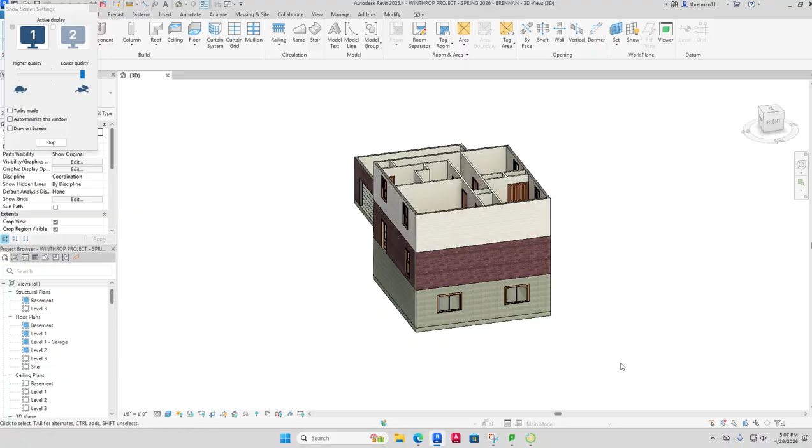Okay, so I've got this right now. Now let's say, as we're working with this, I want some other information. There's a lot of content out here. But let's say you want to put in a kitchen, and you want to put in some items such as appliances or something else like that. Well, it's not necessarily all going to be here. Just to remind you, we talked about this before. These are going to be kind of limited, but you can get other things. So if you can't find it, you could easily go out to the internet and look for it. So this is what I mean right here. What you could do is 2 different places.

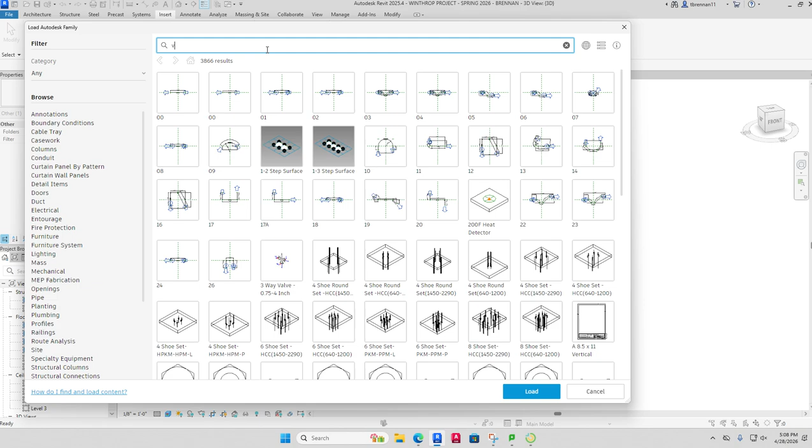First of all, if you go to the Insert tab and go over here to Load Autodesk Family, you can go out here, and this is where you could just do a quick search. If you type in vehicle right here, well, there's nothing there. If I go to truck, there's some trucks here, okay?

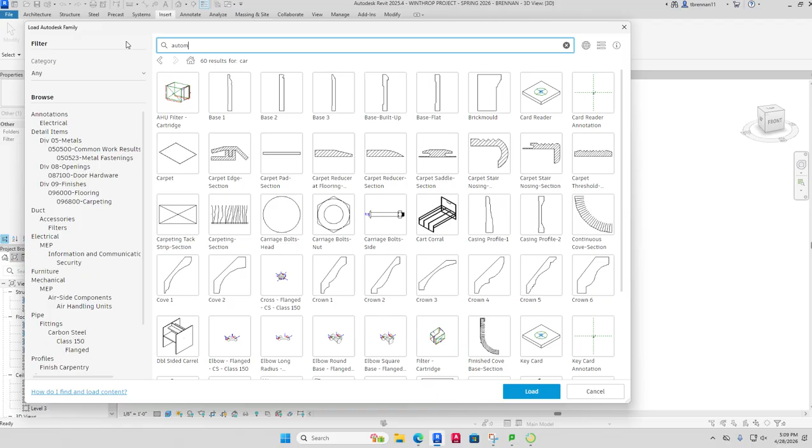And if I go to car, I don't see any cars. I don't think there are any cars. Nope, there's no cars. I don't think it's under automobile either, but I'll give it a try. Automobile, and it's not there either. Okay, so you can find some stuff out here. You can find tables, furniture, all that stuff.

But if you want to grab some other things, you can go out here and take a look. I'm just going to go ahead and type in Revit cars. Okay, so just do that. And when you go out here, you can download cars for Revit free. And you go out here and you find these different areas.

When you go out here, depending upon who it is, you can actually download these kind of things. Like right here, you got a Jeep Wrangler, you've got a police car, a Ferrari. I put in the Cybertruck and stuff like this, but you can download this stuff and you can put it in. So that's the kind of thing you can do.

One of the things I'd mentioned to you earlier: my wife and I got in a big discussion about what we were going to do with our bathroom, and I actually was able to find exactly the appliances, the plumbing fixtures, the vanities that we're going to do, and I built the thing. And once I built it, that's all she had to see. Once we saw it together in 3D, we were like, yes, we will do this. So finding these kind of things is one of the real selling features of Revit, is you can make it exactly what you want it to.

Now for right now, walls are a little bit of a different thing. You can do walls too. If you want to try it, you can, but I gave you a default wall in the template. We haven't really gotten too much into that, but you can try it if you want to.

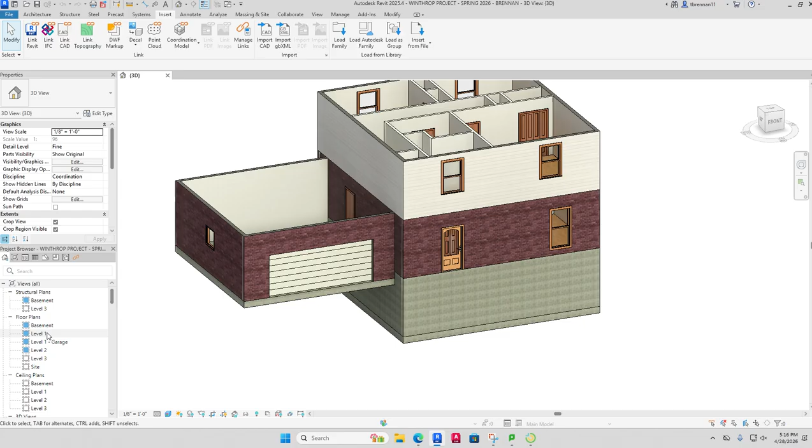So what you would do is, as you're working with it, if I was going to do that in this kind of a thing, I could go to level 1. And then if I wanted to do this, I could create a second floor and actually have it sunk in, just to show how you could do it. You could change the elevations here, just drop it down a little bit. But if you go over here to your east, north, and so forth, see, these are your levels right here.

So what you could do is make a 1.5, a level between these two. So you'd make it like a half level right there, and just drop it down, maybe 5 feet or 3 feet lower than this. So you could definitely do it that way, and then you just use that. Or you could just put it all out here and just drop it. Either way, you don't have to make a level, but it might make it easier to keep track of it.

But since it's just going to be one area, you don't have to do it. You could just sink it and have a lower floor. So yeah, definitely doable. Okay. I'll work through it and see.

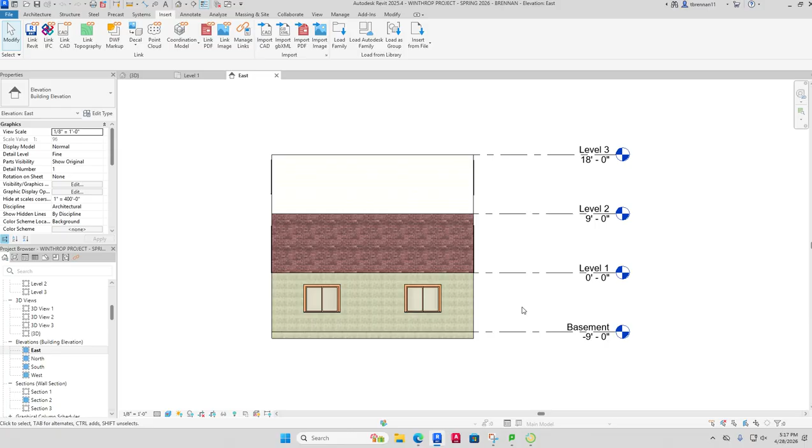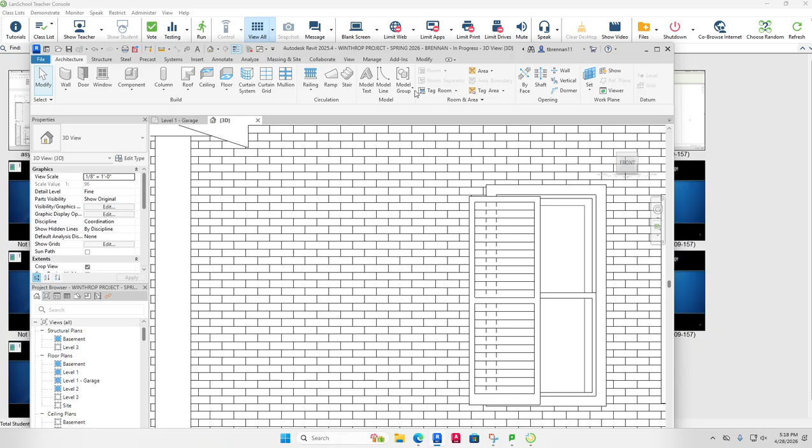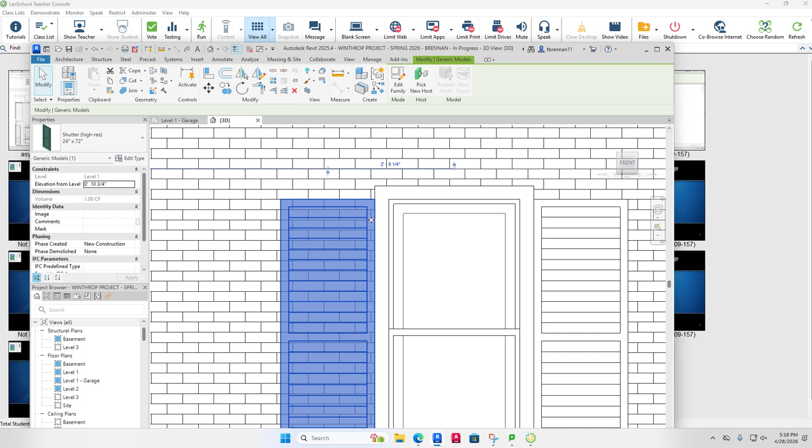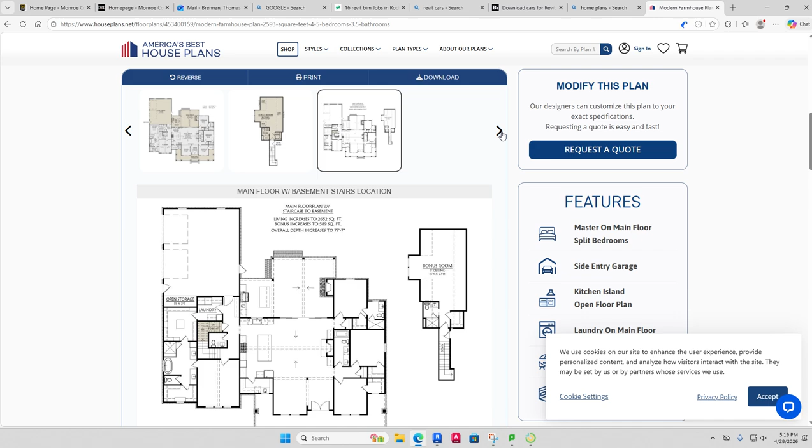All right. Thank you. Beautiful. All right.